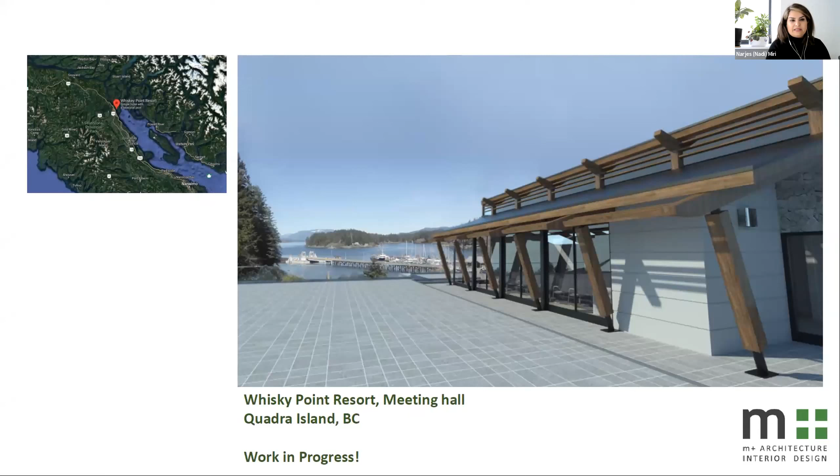Next project is a gathering hall, a meeting room located in Quadra Island near Whisky Point Resort, adjacent to a hotel. We were inspired by the forest, by the nature, and we had no choice but to use heavy timber, stone, and looking at the harbor, we introduced lots of natural light with the glazing. Under planning definition, this building is considered an accessory building. And when I was designing this building, I realized for us, this is way beyond an accessory building. This is the heart and soul of that resort.

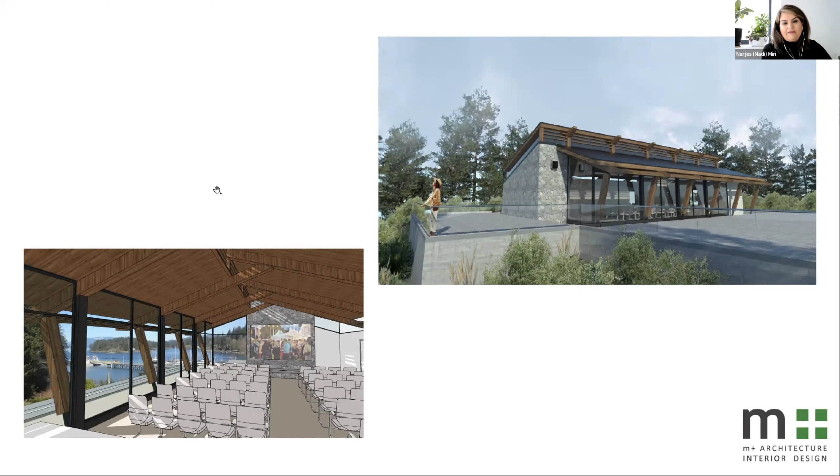People get together to share memories, to celebrate, to make the friendship bonds stronger. And we had to bring more care and attention to this accessory building. Luckily, we had full support from city staff when they were reviewing their application.

Next project is a two-story industrial building in Squamish. It was supposed to be a typical tilt-up boxy building, but I managed to convince the client to think out of the box and allow us to design differently. Now the project hasn't even started construction yet, but there's already a lineup of different tenants he couldn't even imagine, attracting high-tech companies interested to lease these spaces, which support their branding and technology.

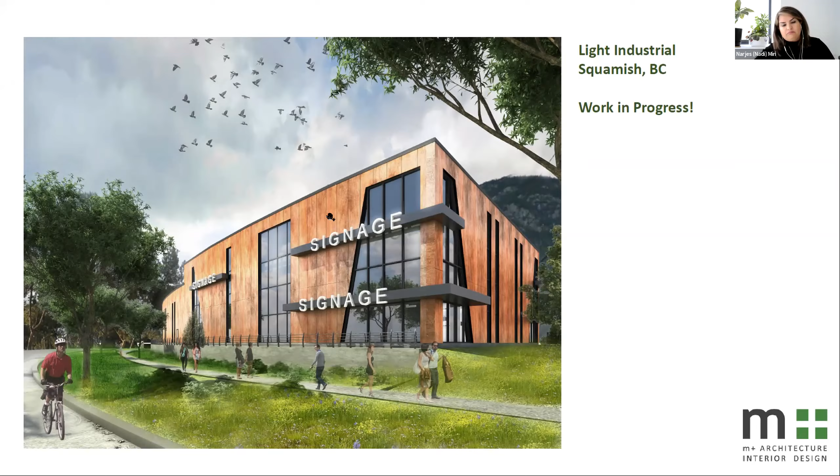This is a sample of one of our tenant improvement projects and interior design work, introducing earth tone, earthy colors. This is supposed to be a spa and cosmetic clinic, and we hope we can create a space that brings a cozy and zen feeling for whoever is going to have a treatment there.

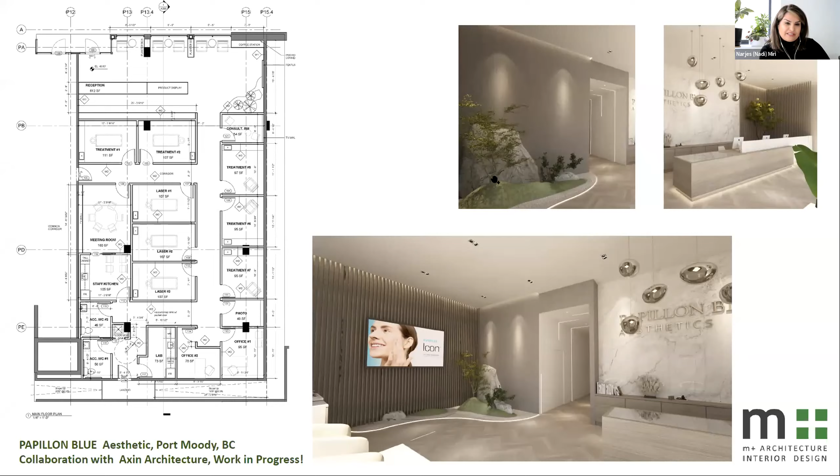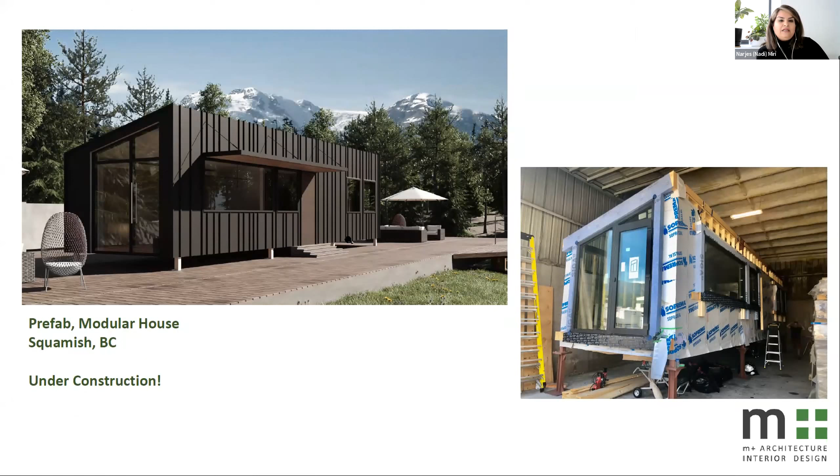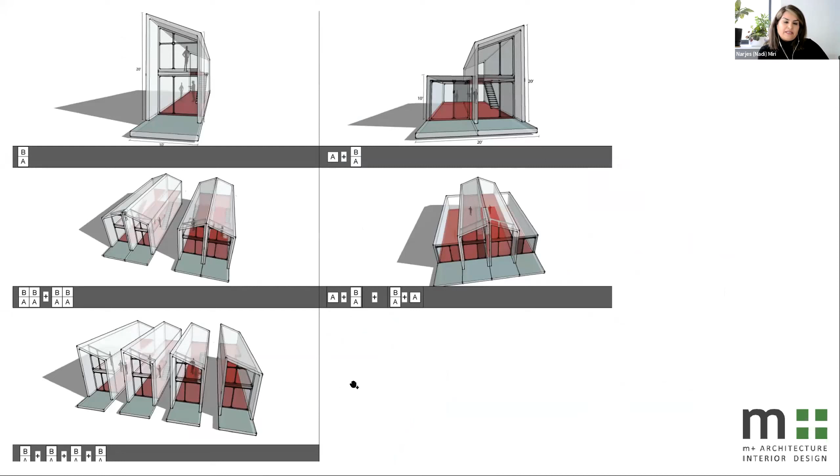This project is a modular pre-fabrication house. The first module is already built, located in Squamish, and ready to be shipped to Kelowna this summer. It's highly efficient, carefully detailed, very efficient in energy savings. This is a 10 by 40 foot module that will fit into a container, ready to be shipped, everything pre-finished with just services connected at the site. We explored different options for the client, who's looking for a development to accommodate vacation homes and short-term rental housing.

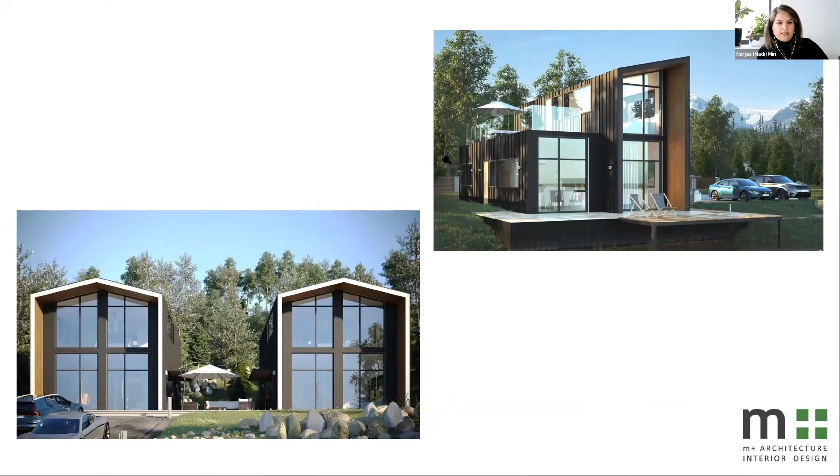This project was a marathon of design. They say God created the world in 7 days - I'm not sure which one is more challenging. We completed the design package for this project in 7 days. The bylaw was changing and becoming effective in a couple of weeks, and the client realized it so late. He approached us, and we pushed the entire team and consultants to complete the entire permit package and design in 7 days, then another 7 days working with consultants. It was a marathon, but we're all happy we're in the queue right now.

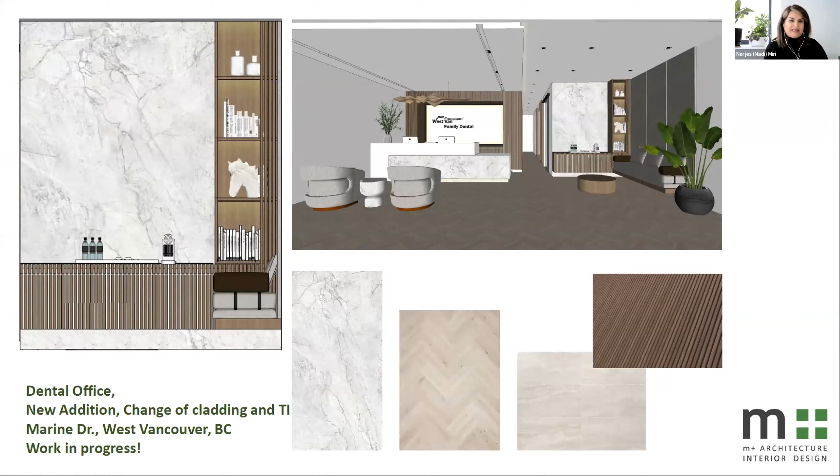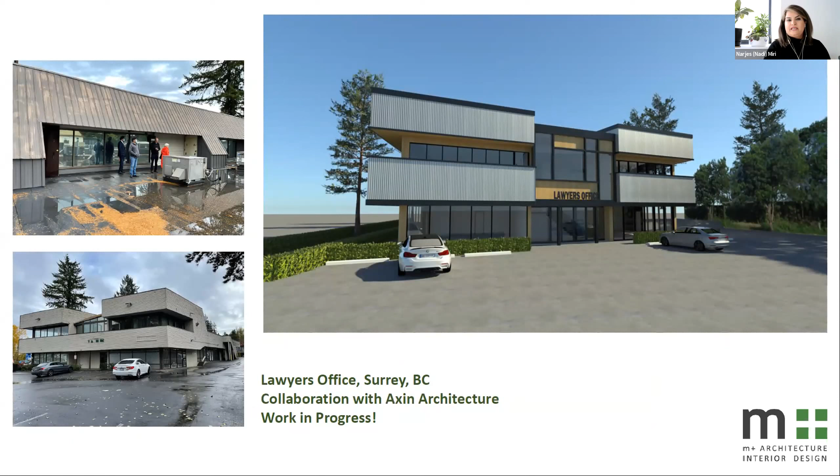This is another sample of our tenant improvement project. We're recently getting lots of dental offices in the Lower Mainland and the island - this is one of them. This is a facelift to a building as well as a tenant improvement for a lawyer's office. We're introducing aluminum cladding and wood to the building.

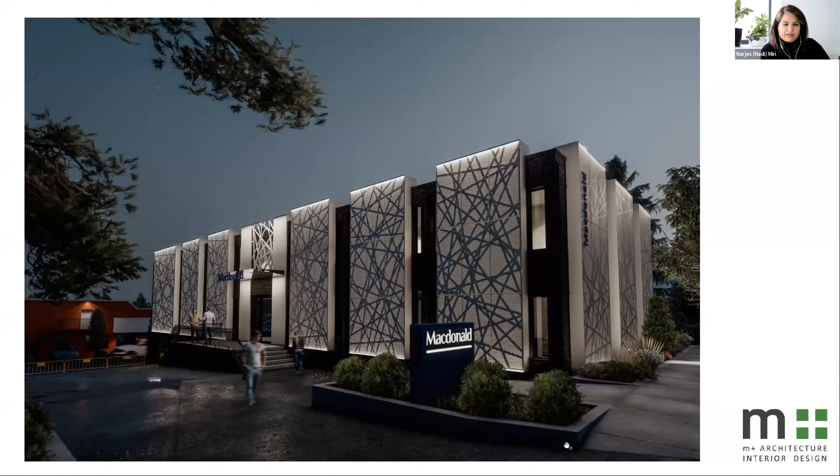This is another facelift to a building, a brick building. We're introducing one tone of color to the entire brick as a background, as a dark canvas, and introducing custom perforated metal panels. This is a night shot.

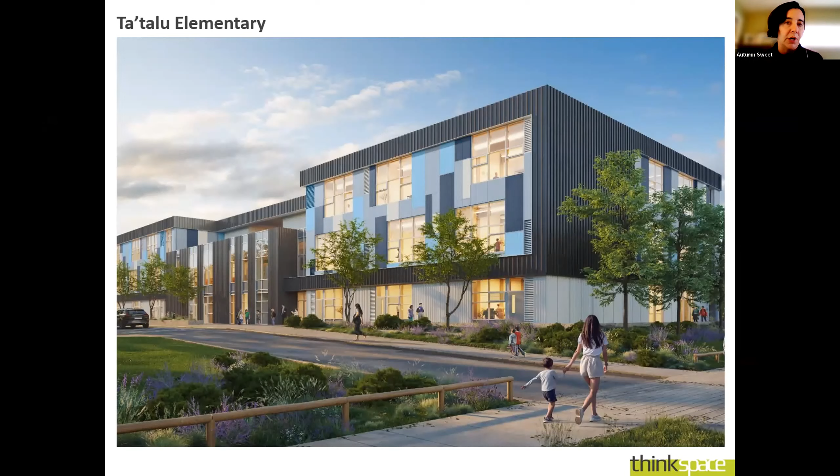The first topic is the Ministry of Education's initiatives, which is always changing. The most recent initiatives that have developed during my 3 years at the district are net zero energy schools and reducing greenhouse gas emissions in schools. The first project is Ta'talu Elementary, and it was the first school in BC to have an option for net zero energy in a project definition report, which we call the PDR.

Net zero energy means that the building will generate as much renewable energy on site as it consumes over a year. We held several workshops with our consultants to determine the most effective energy conservation measures, which include reducing air infiltration at the envelope and setting the air source heat pump to lower temperatures before the backup heat came on.

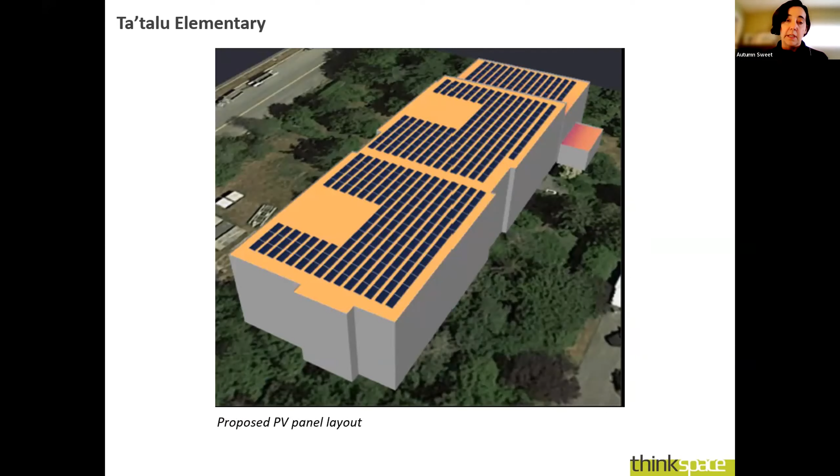With those energy conservation measures in place, the entire roof of the school would be covered in solar panels to offset the energy consumption of the school. Our modeling showed that the payback in energy savings was beyond the life of the measures we put in place. So in the end, it was the LEED Gold option that was approved by the ministry, and not net zero energy.

However, not to be deterred, we decided to switch gears and explore reducing our carbon footprint as much as we possibly could within the approved budget. We're doing this by designing a compact building, implementing a composite mass timber structure, and moving away from gas-fired mechanical systems. Our energy model anticipates 6.6 tons of carbon will be produced, which is roughly half of what our older schools emit.

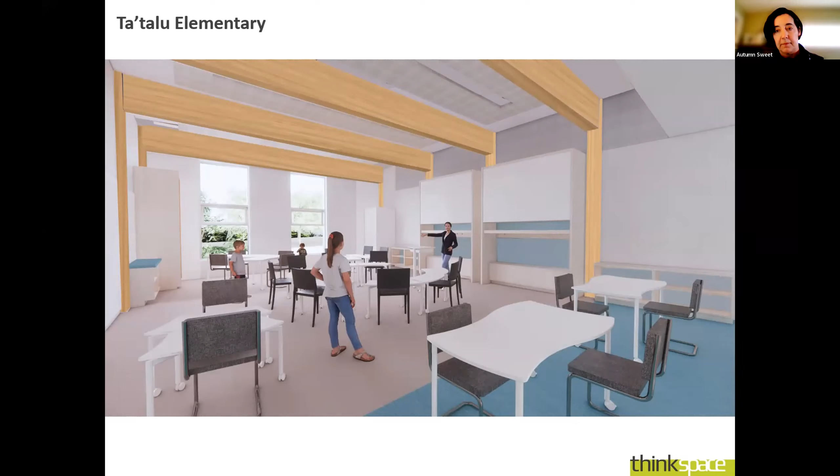Snokomish Elementary was the next school after Ta'talu that went into PDR stage. Now that the ministry learned that net zero energy was not feasible, they switched gears and mandated we had to have an option that lowers greenhouse gas emissions. This was the option that was approved for Snokomish, and it emits 0.7 tons of GHGs compared to the LEED Gold option, which is 6.6 tons.

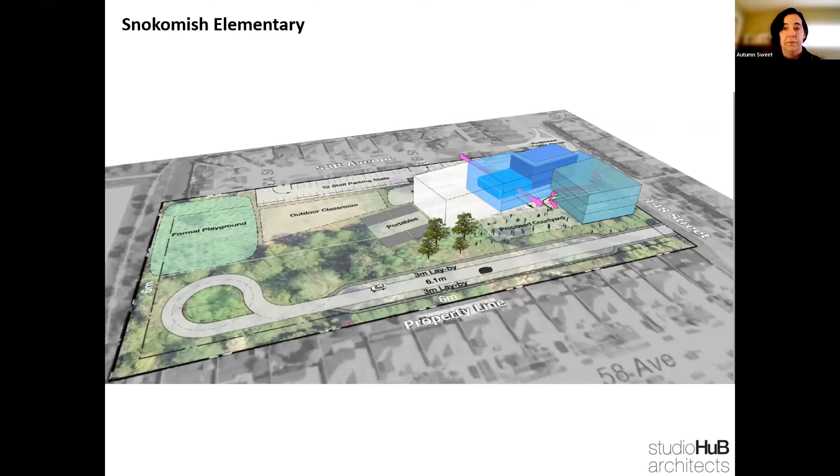Both these schools are 3 stories and have a compact plan, which is not only for energy efficiency, but also a response to the site. Land is a commodity, and we're in constant race with developers to purchase land for schools where they're needed. The school district is forced to purchase smaller lots than previously, but we're building larger schools to accommodate the growth.

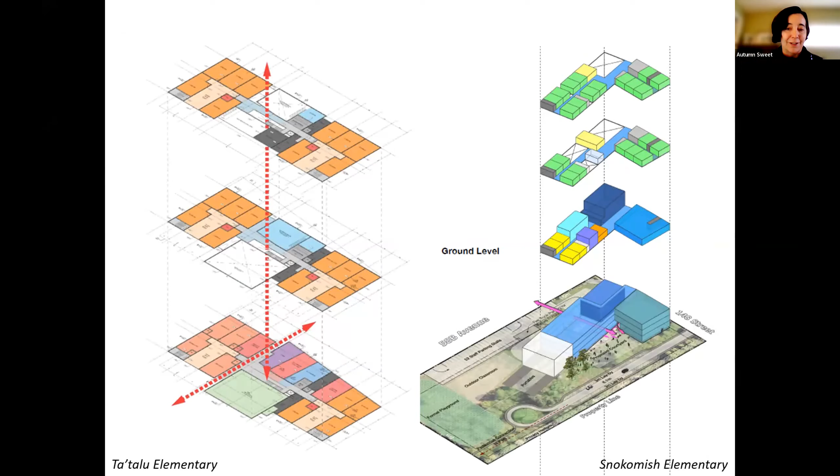Ta'talu is located in a neighborhood that was made up of single-family lots. We were able to purchase 7 of them before the developers did. Snokomish, on the other hand, is in a very dense, established neighborhood, and we obtained the last 2 large lots in that area. This new way of thinking, that schools need to go up rather than out, has inspired us to rethink how we share amenities with the city, who we work very closely with.

Surrey is a growing municipality and becoming more urban. With the future extension of the SkyTrain along Fraser Highway and the city revising their OCPs to include denser neighborhoods, we've started looking at building schools as part of a tower or in a city-run facility. There are already examples of this here in the Lower Mainland and across Canada. The other idea we're putting out there is developing our own school sites into campuses.

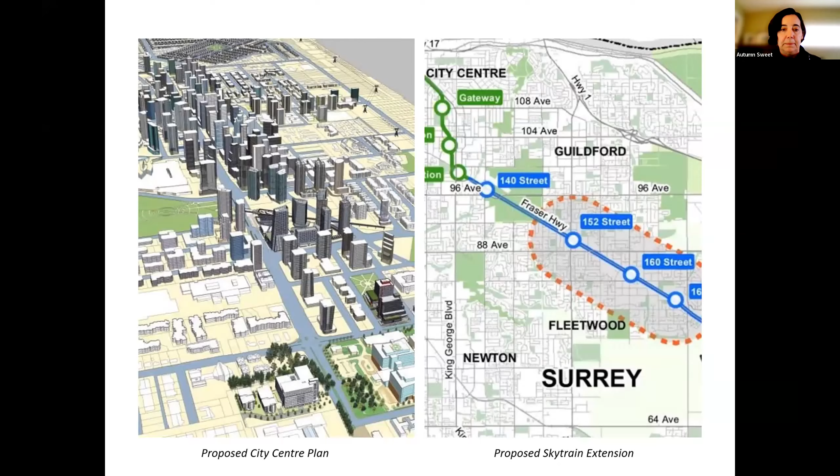Because we can't acquire land as quickly as developers can, we've been strategically looking at potential new sites that could accommodate 2 elementary schools on one site, or having both an elementary school and a secondary school share a site, or take over an existing larger elementary school site, build a secondary school on that site, then build the replacement elementary school on a different, smaller site, which isn't as easy as it sounds.

Last March, the ministry approved a site purchase for a new high school in the Sullivan area, which is already dense and established. We looked at three potential sites, which we were unable to purchase. So now we're starting to think outside the box. Do we build additions on all the surrounding high schools? Do we build on an existing elementary school site? Do we partner with a developer and obtain the land? Who knows? We are in constant flux.

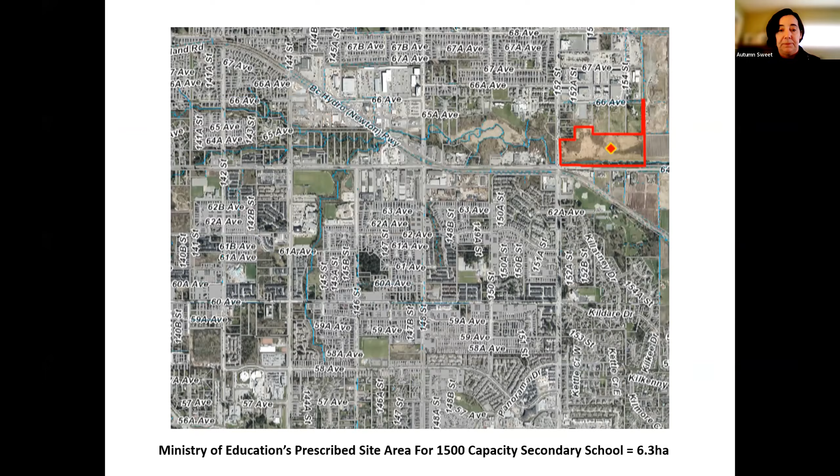So once we have the land and approval to move into design, what happens? First, we retain several consultants, architects, and engineers. Then we establish a steering committee that consists of myself and the project manager, as well as several educators who may or may not be involved with the school when the project is complete.

Part of my role is ensuring that design follows the Ministry of Education area standards, which were published in 2012, 10 years ago. Around 2015 is when BC updated its curriculum, making it more about inclusivity and collaboration. The 2012 area standards don't support this, and so we must get creative to give the educators the space they require to teach in. This often comes down to stealing, cheating, and lying to the ministry to get these spaces. We, as designers, encourage duplicity of space use. The ministry doesn't.

Project space is valuable to educators and students today. These educators love these spaces because a lot of impromptu collaboration takes place, or younger kids see what the big kids are doing and it excites them. Those 2012 area standards don't have a provision for project space, so we borrow areas from other spaces such as classroom or special education to provide the school with what they need.

Recently, we've been having a lot of discussion about the cultural impacts of combining male and female washrooms. On our addition projects that were pre-gender neutral washrooms, we provide gender neutral washrooms because the option for gendered washrooms already exists. On our new schools like Snokomish, we have a mix of gendered washrooms, gender neutral washrooms, and a variety of universal toilet rooms.

So hi everyone, my name is Carmen and I'm a Sociability Research Assistant at HCMA. I'll be talking about fluid sociability, the sociability simulation tool we're developing, and architecture's impact on social connectivity.

So why design for social connection? Socially connected communities are stronger in the way that they react to difficult situations like natural disasters, economic downturns, and pandemics. They're better able to come together and respond to those challenges as a whole, as a community. The built environment also plays a large role in the way we connect with our neighbors and the people around us. So we have a responsibility as designers to think of the quality of life and well-being when designing.

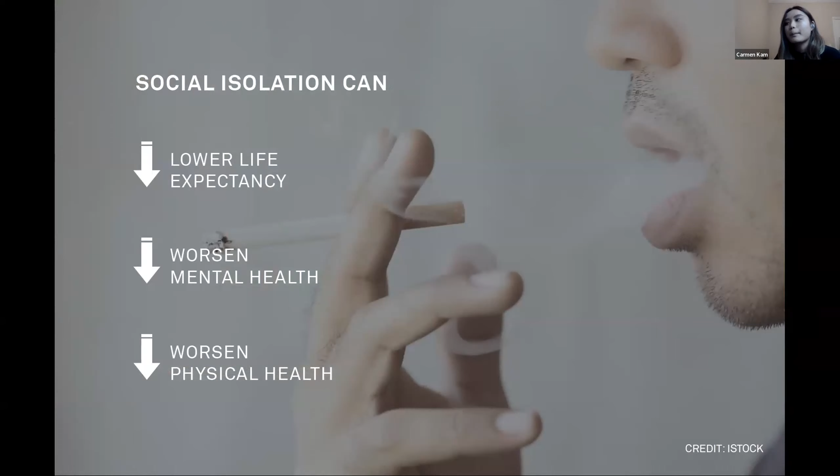So the benefits of social connection on an individual level: sociability can increase someone's happiness, improve mental and physical health. There are studies done where patients with a strong support system are more likely to survive illnesses. On the flip side, social isolation and loneliness can contribute to a lower life expectancy, worsen your mental and physical health. And the health consequences of social isolation has also been linked to and compared to smoking 15 cigarettes a day.

So what needs to happen for a human interaction to occur? What needs to be set in place for someone to talk to someone else?

People need to be in the public realm. One of the general findings we've gotten from Fluid is that the more time people spend outside of their private space, the more they are able to interact and see other people—which is pretty much common sense. The more time you spend outside of your apartment, the more likely you're going to see someone.

And how does Fluid play a role in that? How does Fluid sociability help with social interactions? So we start with what Fluid actually is. Fluid is a public good, open source project. Essentially, it's a simulation tool that measures how social a building is. Fluid is actually an acronym for all the sociability factors that can be affected by architecture: frequency, legibility, uniqueness, intimacy, and duration.

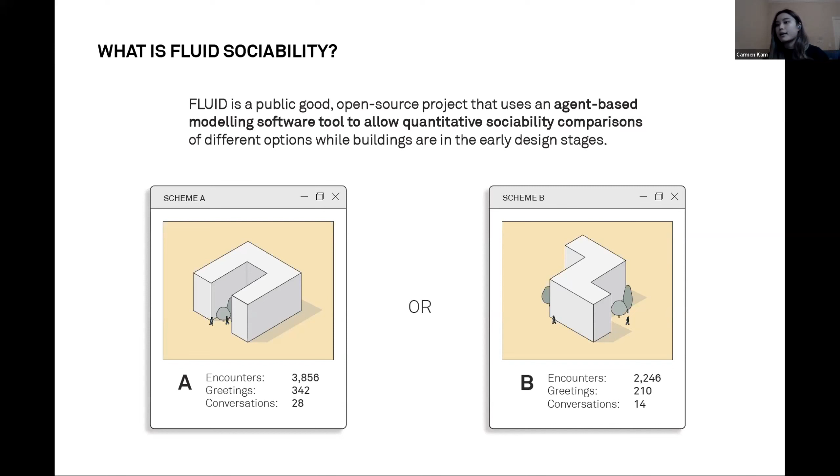And with the simulation software, it produces a lot of data that you can use to compare two different buildings. The research that went into Fluid spans between architecture, social science, and public health.

There aren't a lot of studies available that look at how the built environment affects sociability. A lot of that is what's going on internally that affects sociability and whether or not you choose to talk to someone else. So we've had to piece different studies together from the three different areas to build Fluid. We also partnered with UBC Psychology, and they're our advisors—they help walk us through what would be helpful and useful for the software.

So how do we measure sociability in the software? We go through three metrics. We measure encounters, which is just the physical possibility of an interaction happening—do we see each other? Then we measure greetings and conversations, which is where the actual interaction happens. A greeting can happen when you pass by someone and you wave to them, and a conversation happens when you actually stop to talk.

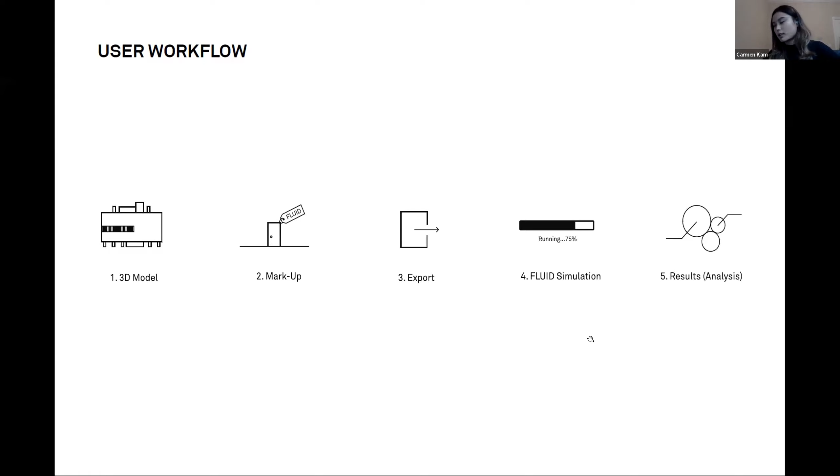So this is the user workflow for Fluid. The user would create a digital model in Revit and then mark that up with the Fluid tags, then export that as an FBX file. We upload that to the Fluid simulator, which is on the cloud, and then we get the results.

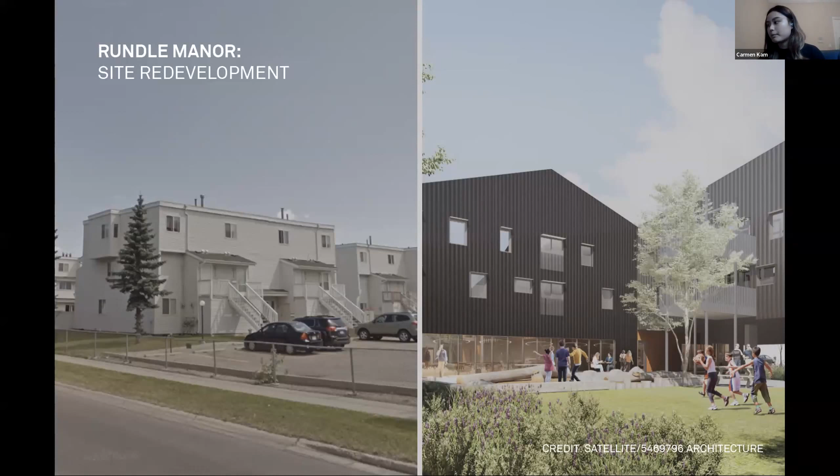And how have we used Fluid Sociability so far? This is a case study we did for the city of Calgary. We looked at one of their affordable housing developments called Rundle Manor. On the left, we see the existing housing that's now demolished, basically a townhouse development with a parking lot in front. On the right, we see the proposed redevelopment by Satellite and 5468796 Architecture.

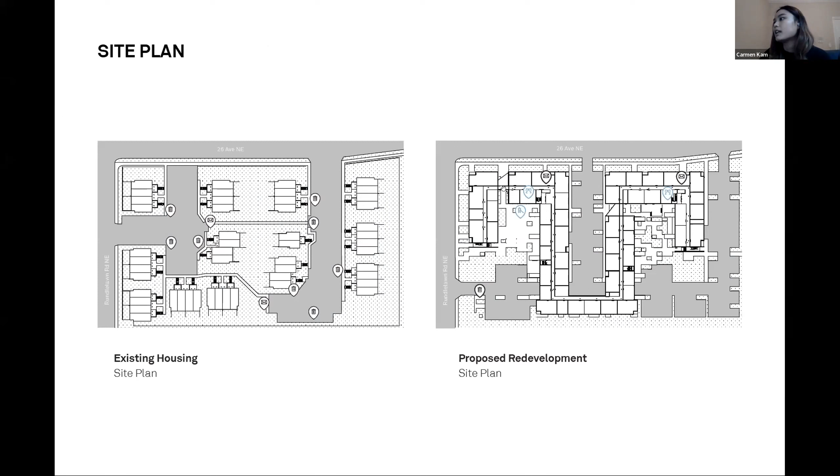Oh, I forgot to say that there are also amenities added into the proposed redevelopment. They have a children's play area in this courtyard, and then they have two amenity rooms as well.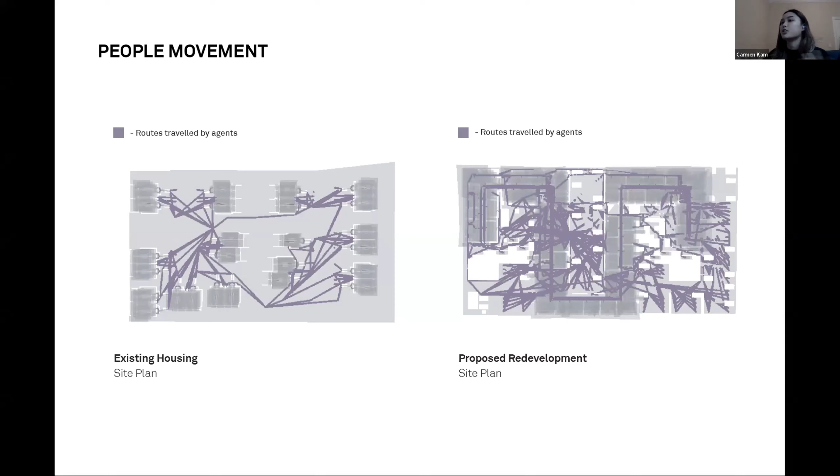And then on the right, we see the proposed redevelopment. We see a lot more mixing on the site, and there's a lot more reason for people to move through the site and to use that space a little more efficiently.

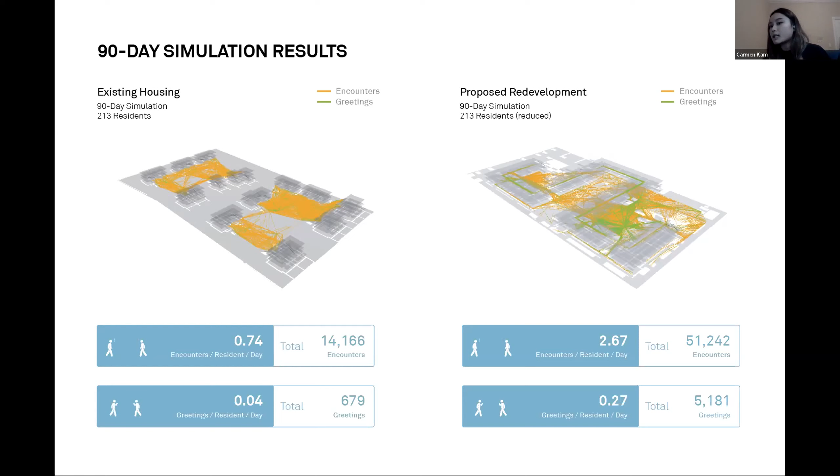And thank you for listening.

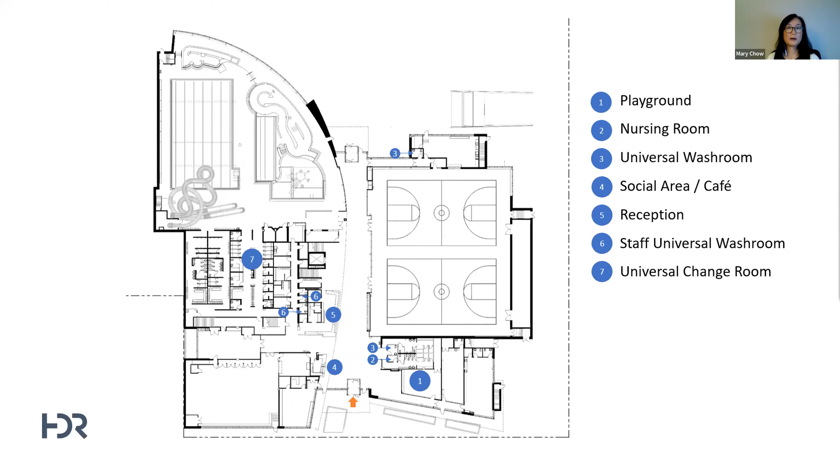We look holistically at facility design, and when we ask ourselves what are women looking for, our engagement becomes more meaningful. Engagement of new immigrant women at the Edmonds Community Center led directly to the early implementation of a central nursing room, close to but completely separate from public bathrooms and adjacent to other spaces that support mothers.

Building design should consider how a new visitor may feel unsure and uncomfortable, that they may feel judged for their abilities. Designs should consider girls that prioritize social gathering, mothers with young children, a need to feel safe and sometimes unseen, or the need to watch and feel comfortable first before participating. Site design should consider environments that make females feel safe.

It can be as simple as locating a bus stop near entrances, well-lit parking lots and paths to entrances that are easy to see and find, playgrounds close to building entrances, and crime prevention through environmental design. Gender equity is good for business. It's good for women, and it's also good for men. In fact, a report from the University of Minnesota has shown that countries that are more gender equitable score higher on the happiness scale. It is our opportunity to design for equity, and change begins with all of us.

Thank you, Mary. Up next, we have Robyn Fenton, Principal Architect and Post-Disaster Liaison from Tectonic Architecture.

Hi, everybody. Hopefully that's working. Can you see? Hopefully you're seeing the correct screen. Can't see your screen yet. Oh, you can't see it yet. Okay, is that working? Yes, it is. Okay, yes, thanks everybody, so welcome. I'm here to talk about architects and their role in post-disaster response. Let me click properly here. Oh, that's not working either.

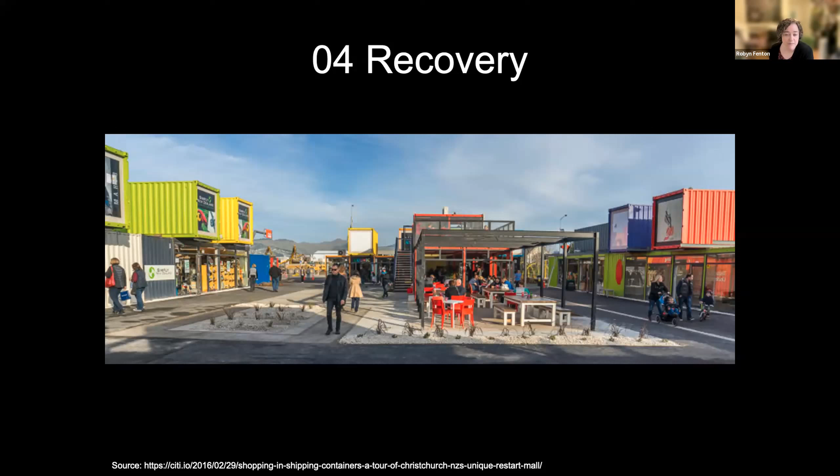The one you may not be as familiar with is the third one, response, and what role we as architects can play in that direct response. Response happens in the hours, days, and weeks that follow a disaster event. The main way, and the training we have and are encouraging our members to take part in, is post-disaster building assessments. The AIA in America has been doing these for about 10 to 20 years, generally done by architects as volunteers.

To understand where this fits in emergency response: when there's a disaster event, the authority having jurisdiction, or local government—the municipal authority—is ultimately responsible for responding. For something like a small flooding event on the North Shore, that's North Shore Emergency Management responding. When their capacity is exceeded, like the recent floodings in Abbotsford, the community reaches up to the province, Emergency Management BC. Then, through BC Housing, who maintains a registry and acts as liaison, they'll contact us as volunteers. Architects, engineers, and other design and building professionals can be on their registry, so you'll be contacted if you're registered.

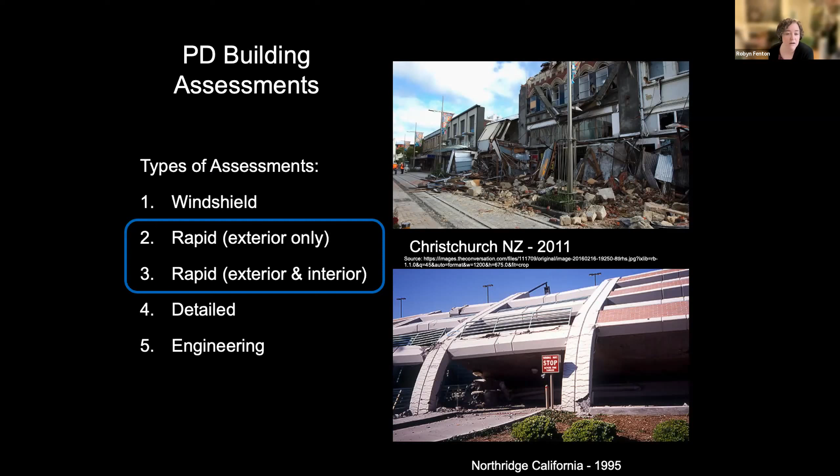Often it's not. And then as a team, you'll determine—it's called posting the building—so you just determine if the building is in fact habitable, which I'll get into in a moment.

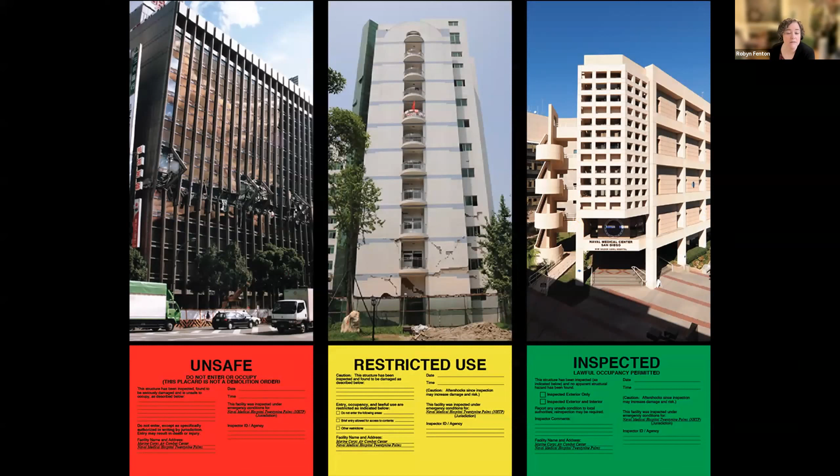So unsafe, the red ones—that's really a building that's totally unsafe and isn't appropriate for anybody to inhabit until further assessments have been done, and likely repairs. It can also mean a complete demolition, that the building can't be recovered.

A green is—we don't call them safe, but we call them inspected. The reason behind that is, especially on a home, if you've just done a rapid assessment, you're basically saying you haven't seen anything that's made you feel it's unsafe. So generally you're saying people can inhabit it, but it's always recommended that people get further assessments, depending on the type of event—flooding, windstorm, or earthquake.

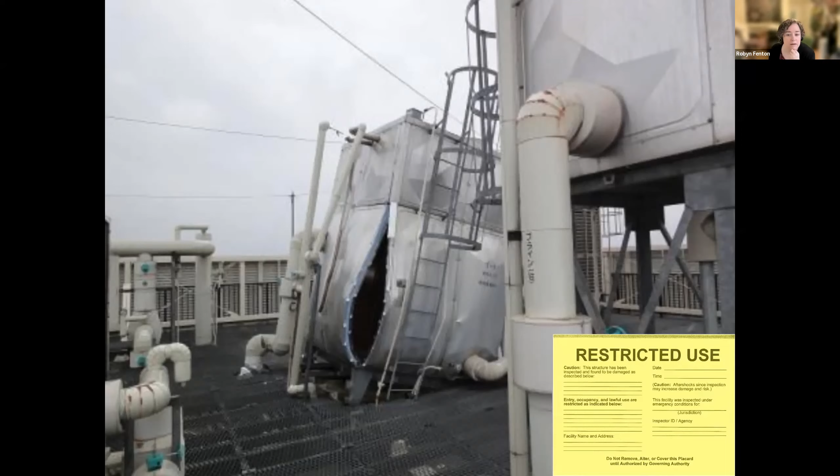And it may vary also to the other end, where the building is quite damaged, but it is safe for people to go in for short periods of time to get their possessions and then get out, but they can't stay in the building. And there's also the concept of habitability, and it really depends on the extent of the event.

So that was speaking about the volunteer roles and the role the AIBC is training people for in the Registry of BC Housing. This is actually perhaps what most of us will face as architects in terms of post-disaster response. There's going to be all sorts of detailed assessments, engineering assessments that need to be done on lots of buildings if it's a major region-wide event, which of course we're somewhat expecting in Vancouver.

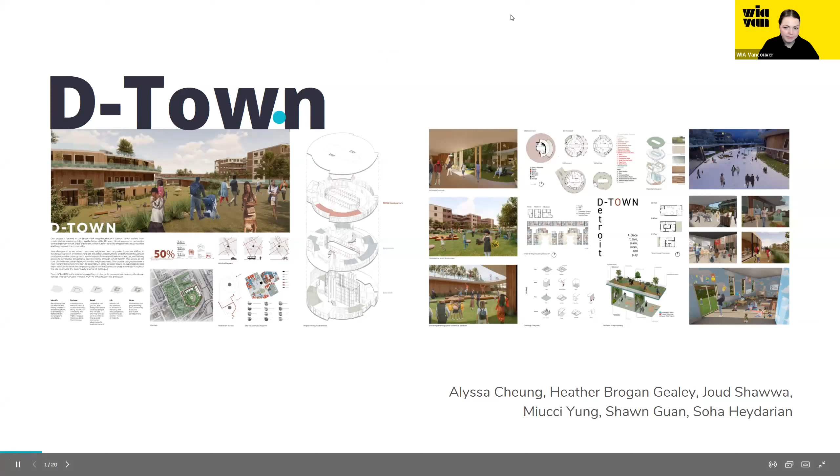Hi everyone, my name is Miucci Yung. I'm a second year in the Bachelor of Design program at UBC Sala. I'm also part of NOMA, which is the National Organization of Minority Architects. This is actually our competition submission for the Barbara G. Laurie Student Design Competition held annually at the NOMA National Conference. I'm part of the student chapter at UBC that advocates for diversity in design education and to create discussions in regards to equity within the educational and professional architectural field.

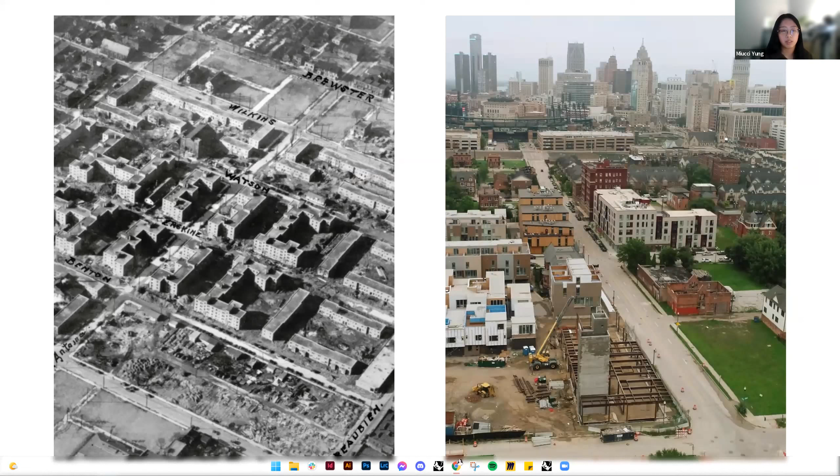So the competition format gave our team of six an opportunity to engage with architecture in other parts of the world, as well as with other minority design students. We took on the challenge of designing the NOMA Legacy Headquarters and Resource Campus, which is essentially a community with NOMA at the center of it all. Some design considerations included honoring the history and culture of Black Detroiters, as well as reimagining public spaces that also consider affordable multi-generational housing, educational resources, and design practices. The online format responded to the situation with the pandemic and various movements, which have always changed the way that we design, build, and live.

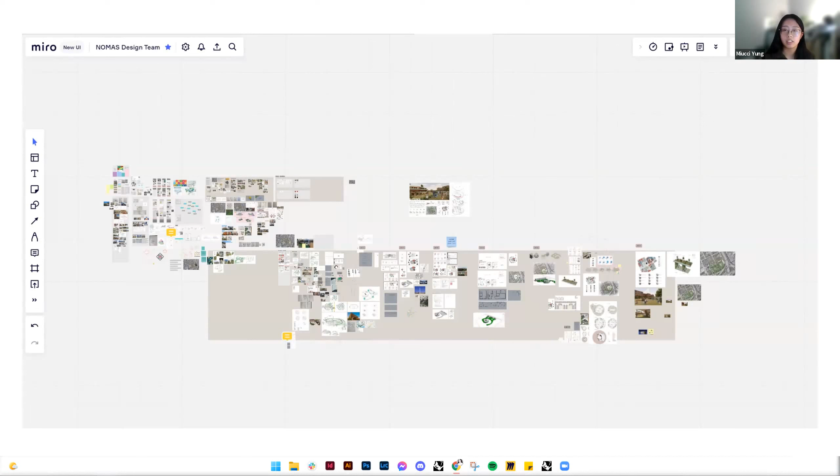Being only first-year students, it was essential that we reached out to design professionals and had the enriching opportunity to learn from mentors from all around the world through the online format. Unlike school projects, the competition was a chance for us to really delve deep into the site and its context. It's a self-initiated exploration of the built environment and also on how we can do our best to address challenges of the marginalized community and respond thoughtfully to the given design considerations.

So to provide some background context, the site is located in Brush Park within Detroit. Historically, this neighborhood has struggled with residential discrimination following the decline of the Brewster housing projects, which also led to the displacement of Black Detroiters, further straining employment opportunities and fragmenting the community. The site itself is located adjacent to the Fisher Freeway - it's a little sunken freeway there. Our final project responds to recent developments in the area and includes programming for mixed-use housing, retail units, as well as a community center in order to address the empty and disconnected nature of the Brush Park neighborhood.

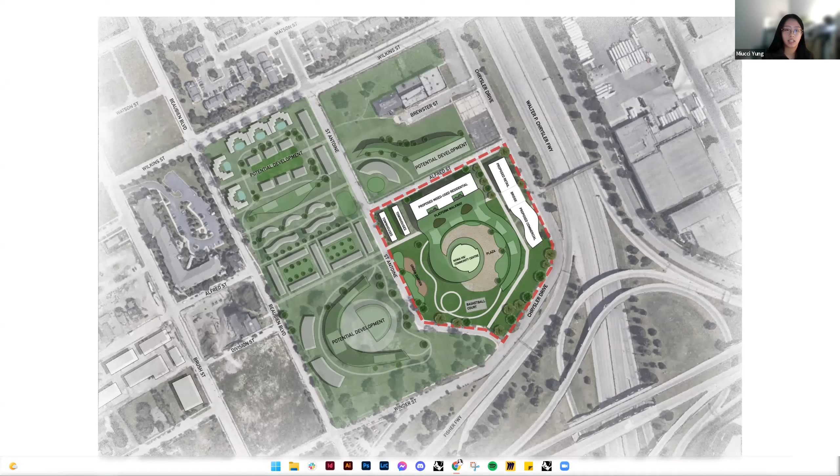So as a student, we felt like the biggest change in architecture starts at the educational level, and becoming part of this next generation of designers, we identified that empowering young people to affect change in the community through design was crucial, and also reflected in NOMA's Project Pipeline initiative, which is essentially education for children that fosters that next generation of design professionals.

Just like this competition, accountability in design starts at an early age in terms of connecting young people to real world architects and planners. It's important to create an environment that fosters this connection in our final design. Some questions we looked back to were: who is this design for? What is the design problem, and how will this be used? We tried our best to make sure that this site reinforces education in all forms, be it through the workspaces, the garden spaces, classrooms, etc., so that youth can really see the rest of the site with our final form.

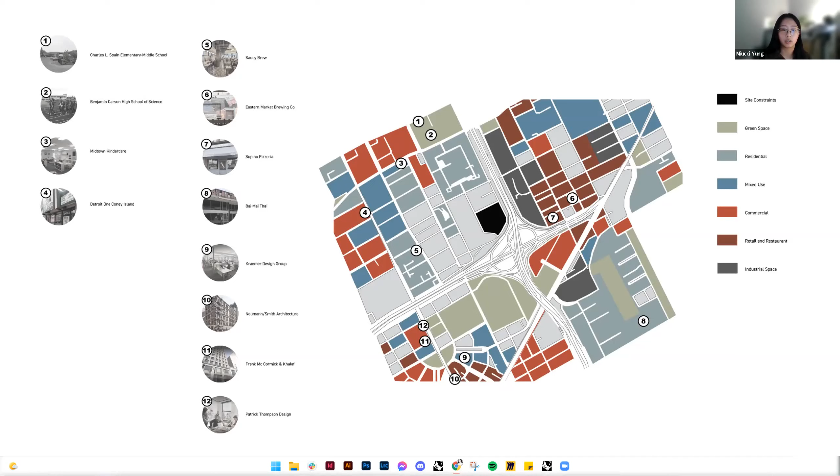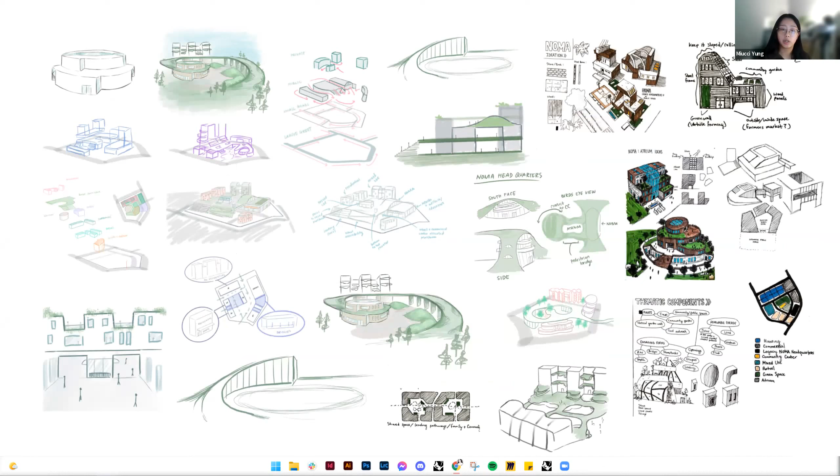Looking at the site adjacencies, we tried to decipher what this reimagined public space looked like. Being a designated urban mixed-use neighborhood, we focused on opportunities for growth as well as an emphasis on locality. Our site aimed to bring people together through positive public space, since learning comes from other people. An organic form throughout the site ensures that no back is turned onto the community, as prevalent in the massing sketches, and made sure everyone was welcome with entrances from all sides. Improved walkability throughout the site provides opportunities for people and ideas to meet.

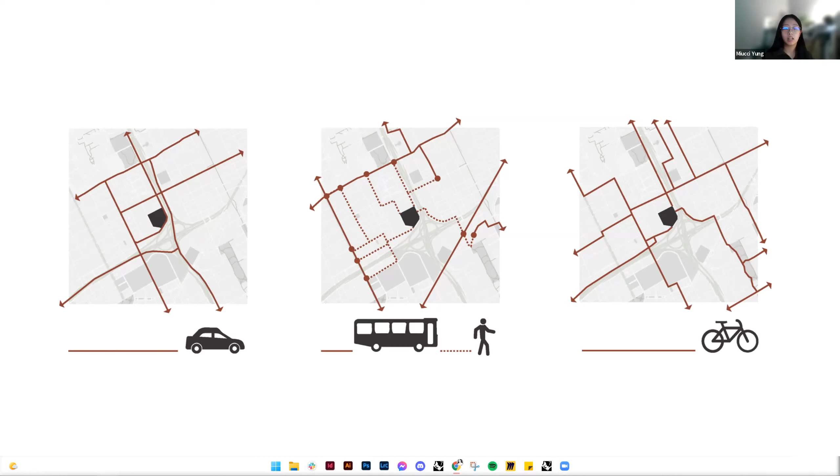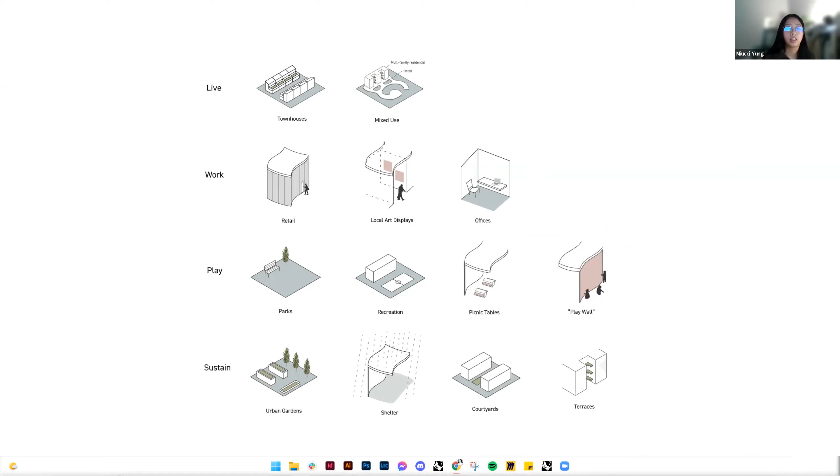It's important that there was multimodal access, as this community was designed not just for those in the Brush Park neighborhood, but also for the greater Detroit area. Wrapping it all together is an all-encompassing platform utilized as opportunities for people to really make it their own. With growth being perceived visually as an upwards motion, our site's form provides an elevated perspective and figuratively gestures towards that growth on a local scale through its live, work, play, and sustain opportunities.

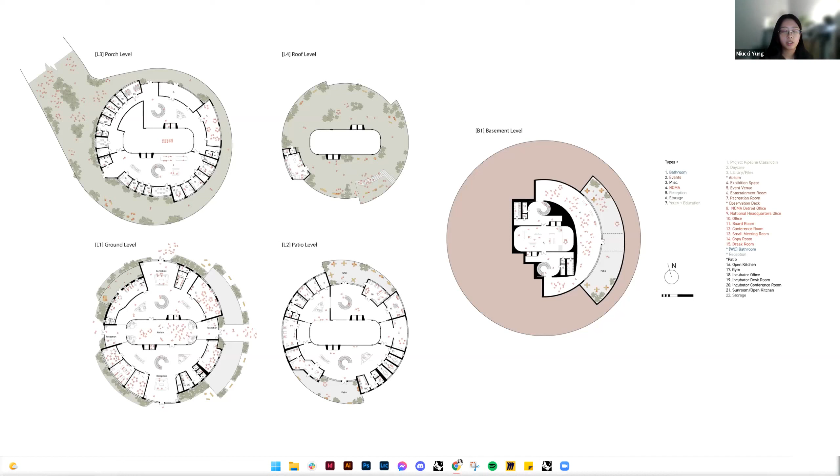The circular design promotes a very non-hierarchical environment. The atrium at the center of the Noma headquarters unifies programming with spaces for local events and gatherings, while also opening up opportunities for organic connections to thrive. There are incubator spaces for startups within the Noma Center, as well as an open kitchen on the second level that opens up to the patio.

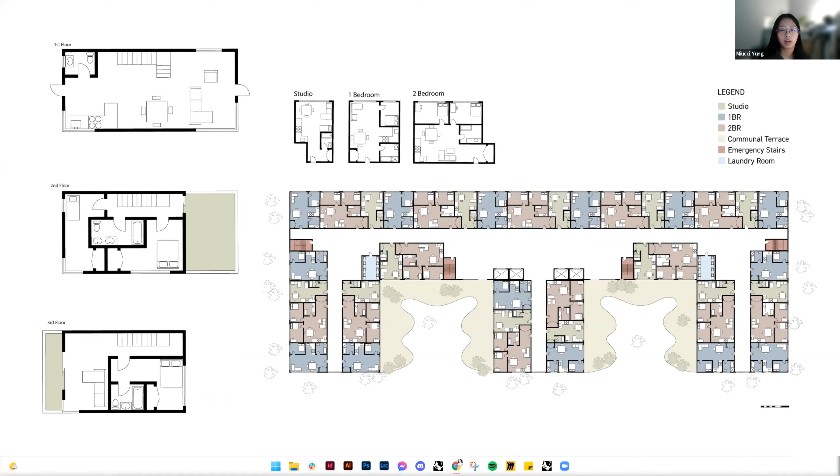Designed with multi-generational housing in mind, there are open terraces on upper levels for close proximity to open green space, as well as connecting doors between select studio units that accommodate multi-generational housing while also maintaining private space. With Detroit currently ranking last in acres of park space, our site includes green spaces such as these platforms, residential terraces, and townhouse courtyards. These vertical gardens mitigate noise as well as CO2 absorbance throughout the site, especially being located right next to the freeway.

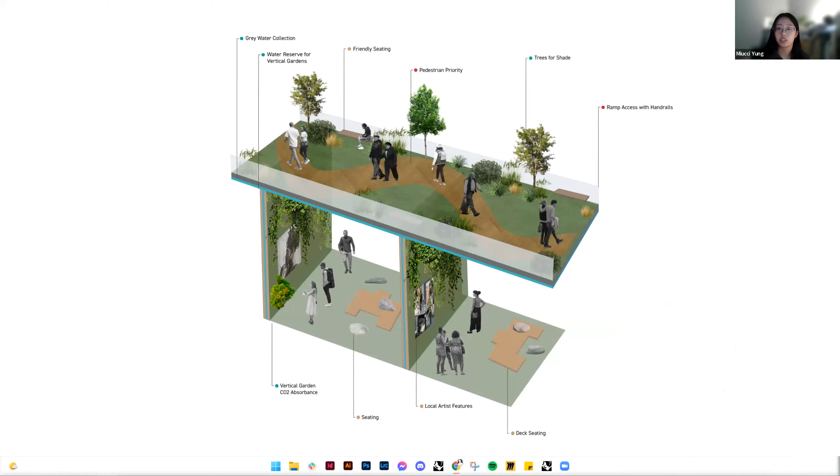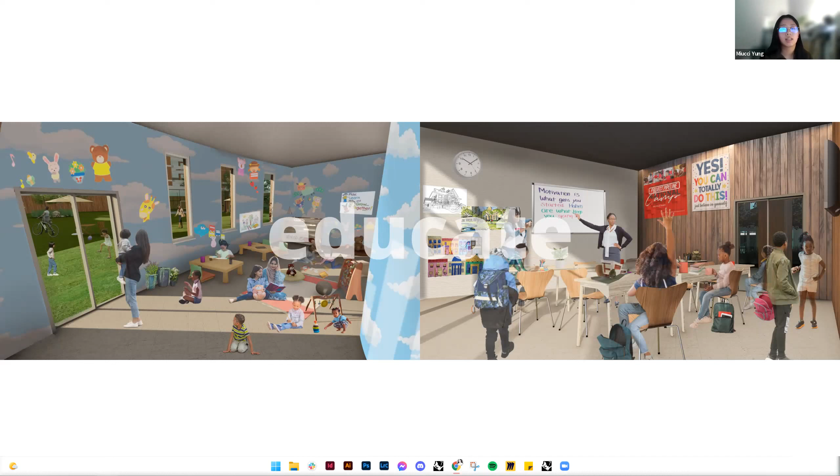In terms of going back to educate, these project pipeline classrooms throughout the site and workshops on the ground floor create ease between navigating the spaces. As youth progress through the programming, they're able to explore the built environment, connect with their community, and grasp lifelong tools for success by helping elevate their perspective of youth and envisioning their futures.

Looking at our programming as a whole, we emphasize the interdisciplinary and universal aspect of learning, how having headquarters at the center of our project helps drive the programming forward, with the platform as an extension of the headquarters throughout the site, weaving through the spaces where people live, work, and play.

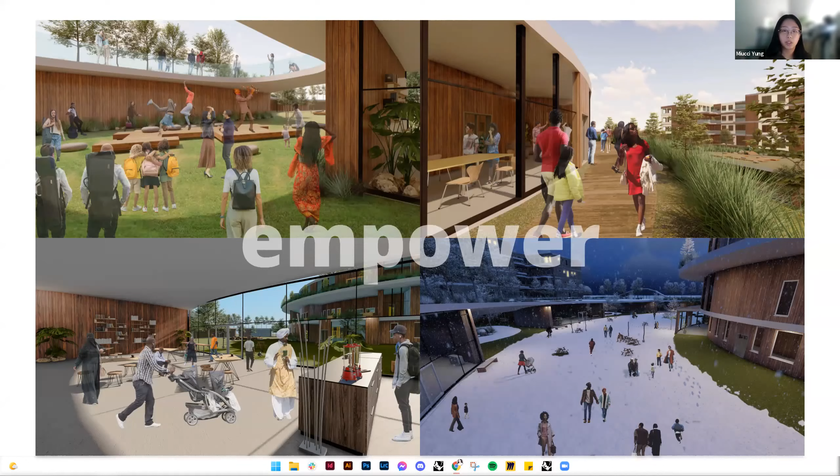Finally, empower. The economic and cultural hub of D-Town empowers different communities to come together, pursue their dreams, and help both each other and the Brush Park neighborhood grow. The final rendition of the reimagined community centralizes education, employment, and affordable housing to catalyze equitable urban growth, spatial agency for marginalized communities, as well as lifelong access to conducive educational environments, with Noma at the center of it all. Thank you for listening.

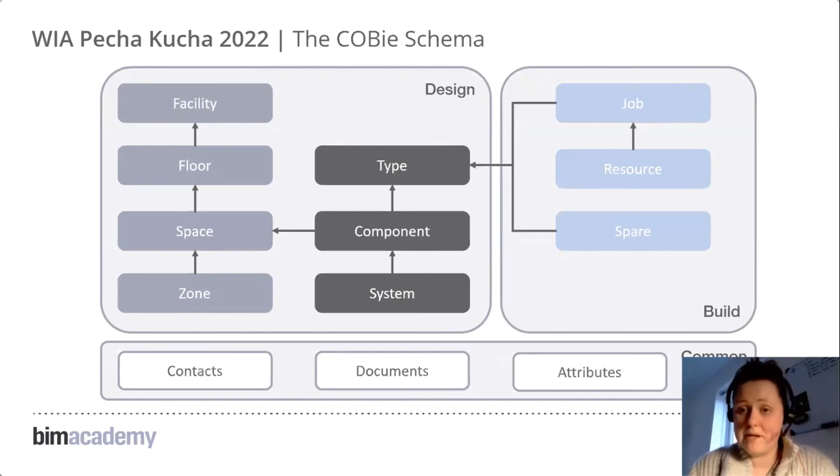Okay, but why am I, a UK-centric person, so excited to be presenting at a Canadian event? Well, I am currently managing the BIM implementation on the new Surrey Hospital and Cancer Centre in British Columbia.

We are working with the client, Fraser Health Authority, to clearly set out their information requirements using UK best practice and the ISO 19650 suite of standards.

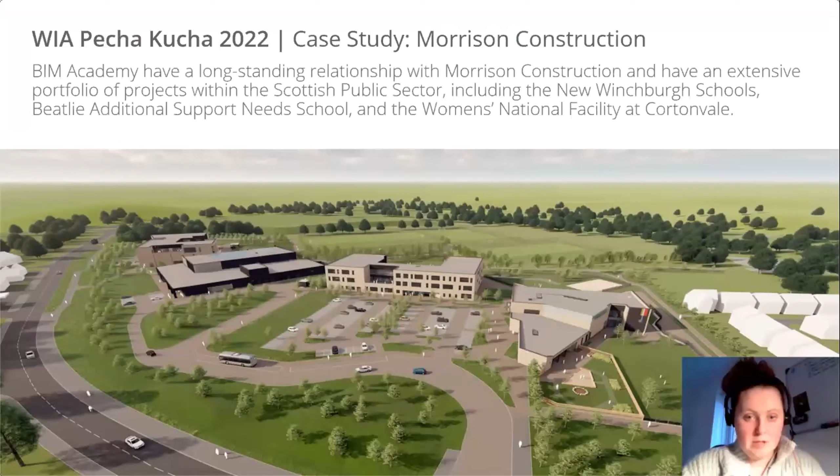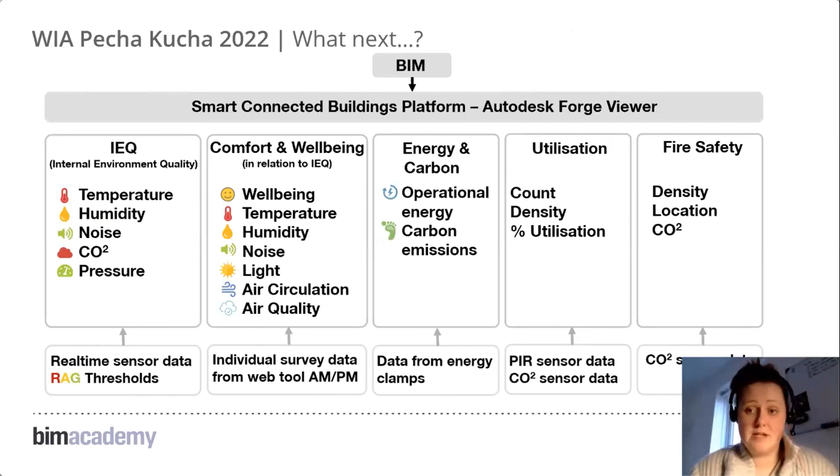Along the way, we have picked up several lessons learned. Having a global perspective across different public and private sectors has really emphasized that every digital transformation journey needs to begin with the why. We're also starting to see wider applications of BIM, such as in gold mining and infrastructure, as well as a shift from technology-centric to a more holistic view of information management.

Finally, I just want to reiterate my thanks for being invited to the event, and I hope you have taken something away from my short presentation. I truly believe information management is doing wonders for the industry and holding all parties accountable in producing good quality information that not only allows for the efficient delivery of a project, but allows clients to make better decisions well into operation.

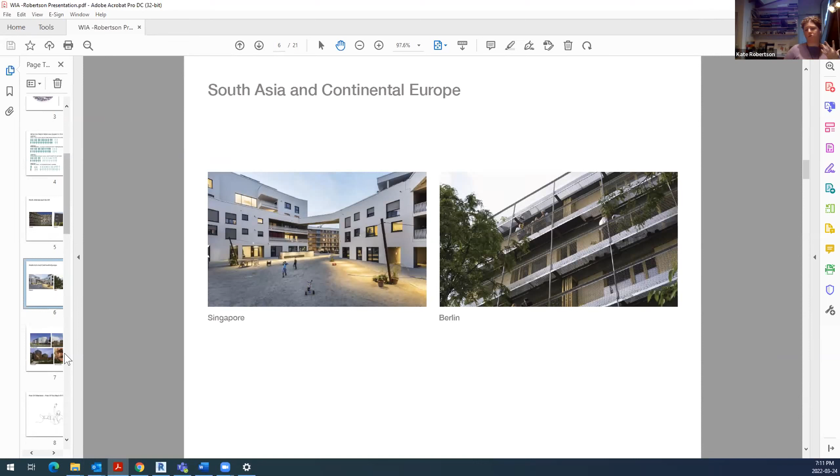is that the lived experience of space is what makes the difference. And that legacy carries through to the language of place and space, and what we associate as home, what we associate as good, what we associate as better—all these key components that are central to discussing social housing. Now, I'm not saying all social housing is bad.

It really isn't, and there's a lot of extraordinary work. Pritzker Prize winners do social housing. Wonderful people in Canadian architecture, publishing Canadian architects do social housing. There are some great firms in Spain, Los Angeles, and all over the place. If you're going to go look for something good, you can find it if you look. So then you pose the question: well, what is our story here, and why is this such an issue?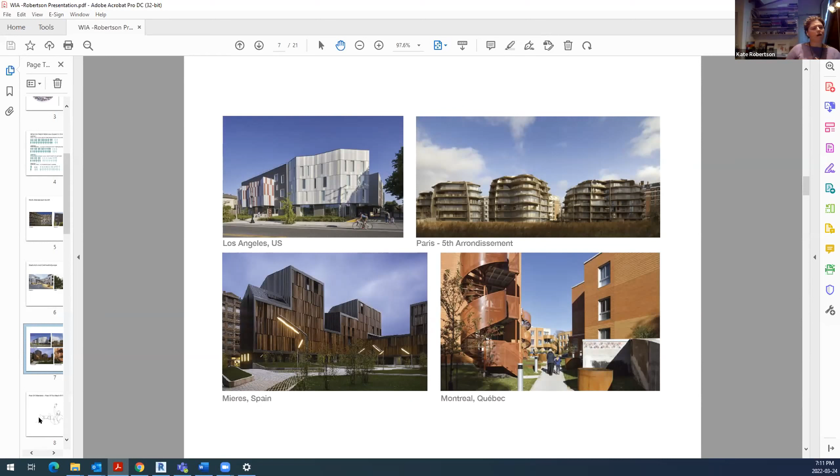Fear of otherness and fear of too much are the same thing. When we talk with people about this, there are two factors: either the fear of people coming into the community and being scary, dangerous, questionable—you don't know who they are—or too much of the same: repetitive, restrictive, limited housing that doesn't really serve the purpose of who you are as a person or what you're trying to do. Again, talking about lived experience.

Now, this all comes down largely to our language as architects and how we approach this. When you're getting into the fear of this, homogeneity and car dependence are historically huge factors. Whether you live in a dense development—6-story, 10-story buildings—or in low-rise, very low-density suburban housing tracts, the same issues come up: homogeneity of population.

And that comes out of the fact that certain people can afford to live in any of these places, and developers and different groups are really trying to expand their footprint in any building, generally speaking, whenever they purchase land, because it's expensive. There's all the infrastructure of stairs, elevators, ramps, code, and all these things. And I am not saying in any way, shape, or form that we should delete fire trucks out of our life.

They're important, I understand the purpose. It's really valid to ask for that as a requirement. But the question is, it does set a baseline of who can be there and who that language of place is going to be catering to, because they have to offload those expenses from larger structures to more units. Therefore, they want more units per building. They want more building on the site than they ever would before, causing conditions that may not be ideal.

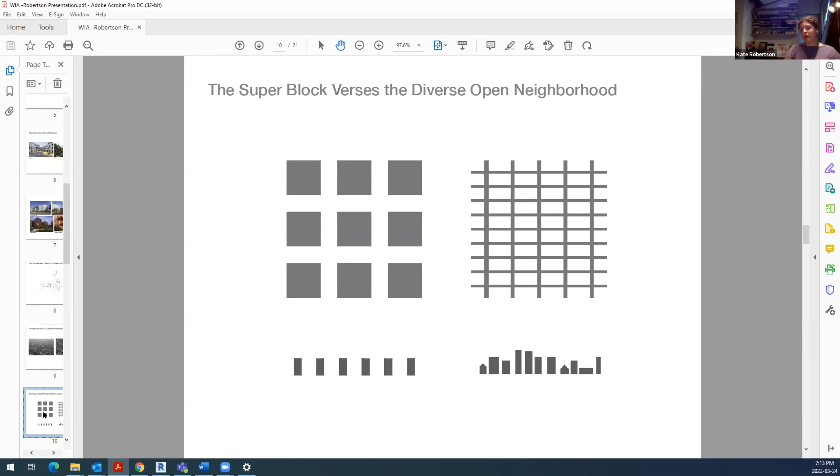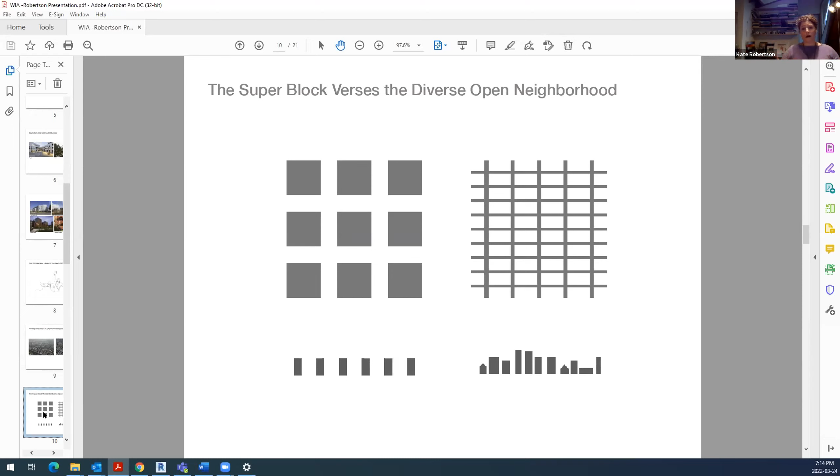Social housing definitely suffers from the same thing, it's not unique in that regard. So when you're talking about outdoor space and all the pieces in between, whether you're talking about the reinvention of the superblock in Spain, a really popular conversation right now, or Jane Jacobs' open grid system with the open neighborhood, the issue still remains the same: how do we create a positive, great relationship between building, place, and the surrounding space in an urban or moderate context.

So when we're talking about that, we're also talking about the protections of safety and resources for children. This is a big topic. Moms want to go back to work, they can't because they don't have that access. We have the federal government talking about child care grants and all sorts of things, and we do a lot of child care work in our office to talk about giving people the opportunity for being active in the community and active within the economy.

So these perceptions of safety really matter. When we talk about comparisons of the types of building developments we do, courtyards really do matter. Those extra spaces that don't fill out the lot make spaces available for children, for families and community to access, and that's really important. In a suburban context you have your backyard, and that's great. But when you get into a higher density situation, these things frequently get pushed off the table, the building keeps getting bigger, the site keeps feeling smaller, and you end up without that kind of access.

The other piece in this is the stigma within a community. When you're talking about social housing, there's some pretty pejorative commentary I've heard, unfortunately, the idea of NIMBYism and the sort of, who are they and why are they here, why can't they afford a house, why can't they do what we do, I can do that, why can't they. The issue is you frequently have to take a step back to remember that you have to come where other people are at in terms of how they're functioning in the world.

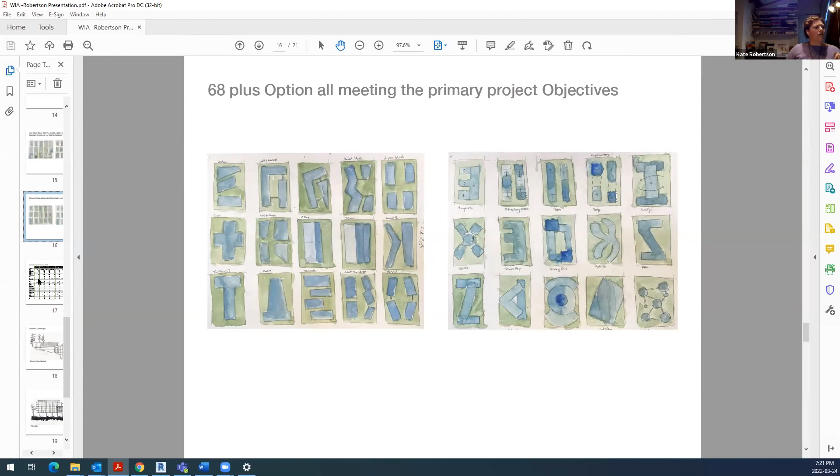So then you go through, as I'm sure we all do, the concept of massing options and matrices to really understand what happens when you test drive that in terms of your proforma, your model, GFA, your building composition, the efficiencies - because we are in Step Code 4 and our office practices Passive House standards as a general rule for all our buildings, and we try to engage and get as high as we can on that podium. The other key component we're looking at very intently is the livability index for a typical floor.

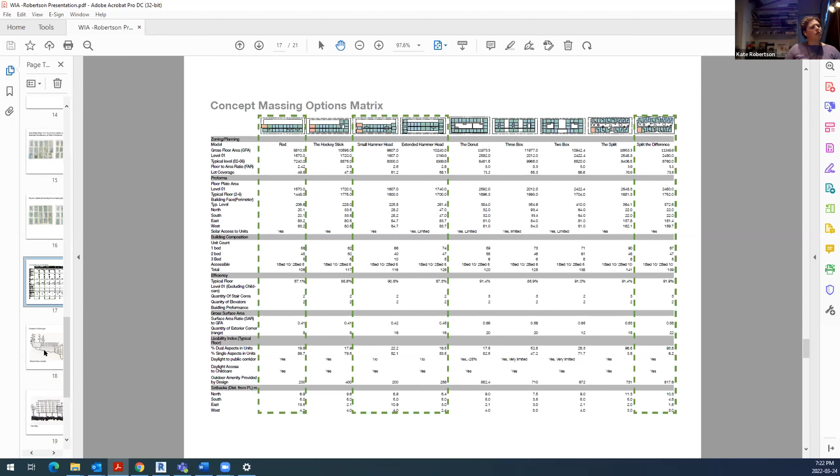What's so fascinating about the exercise we went through after all this was said and done was we have the standard sort of options and forms that you see highlighted in green, but the one that was the outlier, and actually the most popular, was a building that took on a carrying capacity of an extra 50% more units. This was because of the way we looked at the form creatively to address the different components of what it is to dwell in place, and how you create units out of a standardized, modular system.

That's awesome and great when we're looking at flat sites. But these are the most common challenges we are going to reach. If we are extending and having that density population shift east, the challenges of environmental and geographic conditions become much more prominent, and how social housing deals with that as designers, architects and engineers becomes even more pressed, because whenever we get into things that are not rectilinear and not flat, it tends to get more expensive. So if you already have an issue with housing being a cost-effectiveness issue to make bigger buildings, you put it on a hill, you're going to cause an extreme increase in your budget simply because of the mechanics of keeping things from sliding down a hill. So slope grades become a real issue of social housing that are questions.

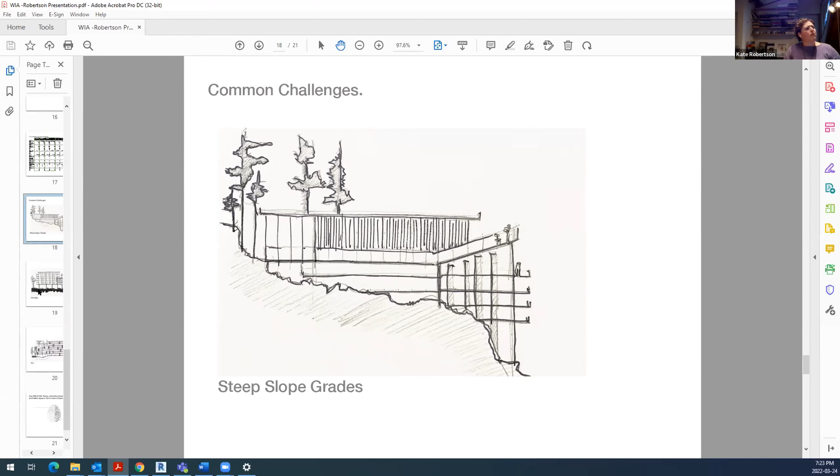I never thought, except when I'm printing drawings late in the evening, of the notion of flooding or living on an island. However, I was faced with this year because of the flooding in the Fraser Valley. I live in Abbotsford, and I was on an island for almost 30 days with limited access to resources as a result of it. What you realize is the substantial risk for a lot of people on the prairie, where development will occur in floodplains and other zones which are limited or questionable, that may be affected by expansions of a river like the Nooksack River flooding as it did, or the expansion of climate change and water rising and backing up into these river basins because the ocean is rising due to climate change. These can become really serious factors.

And again, this does promote the idea of, well, how do you reconcile a raised building with accessibility? How do you reconcile the issue of cost and stability and seismic applications?

And of course, then we look at the last aspect, which is fire. I talked to an elder up in Lytton, and they said it wasn't just the fire and the fear of having their homes burned down that was an awe-inspiring event. It was standing shoulder to shoulder with a person on the other side of the river watching their house burn. That fire burned hot and it burned deep. It melted infrastructure well 5 feet below grade. And there is nothing left.

And we see this in the news. There is a monstrous cleanup involved in Lytton, but also Fort McMurray and other centers which are looking at these kinds of risks that we may not immediately have within our current footprint as metropolitan areas in the Fraser Valley. We start creeping up into the mountains, we start creeping into other places and expand across the landscape. We will have these questions that we need to ask.

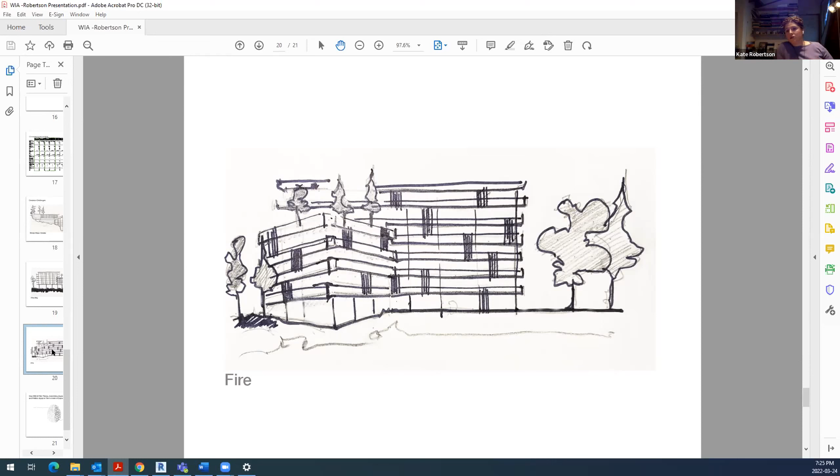So I guess the question, the last slide I have here is, well, how does all this theory, anecdote, experiment, policy, and politics apply in the areas of expansion? I guess the 4 takeaways I can take from this would be that there is a question in practice about what we decide to do with our projects.

We are the people who control this to a certain extent. And yes, there are RFPs, but the advocacy aspects, whether it is to do with equity, accessibility, form, meaning, space and place, all that content is really in our hands. And that responsibility we have is awe-inspiring and shocking, but it's also a little bit overwhelming.

And the last piece I would take away from that would be that peripheral content matters. Juhani Pallasmaa talks about it in his book, The Eyes of the Skin.

The idea that form and space should be affected by, and viewed with a peripheral view to understand the holistic parts of us all and how we live. And to remember that on average, it takes 3 to 6 tries to get something right. So if you're going to persist in this and persist with clients, please do, because if you persist, we all persist, then we all end up making a better place. So thank you so much for your time.